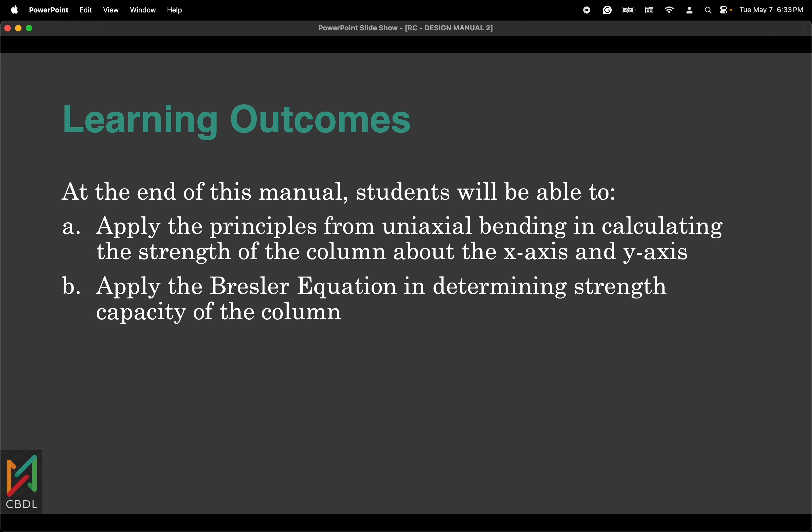For this time, we're going to discuss the analysis of short columns subjected to axial compression and biaxial bending through manual calculation. At the end of this lesson, students will be able to apply the principles from uniaxial bending in calculating the strength of the column about the x-axis and y-axis, and apply the Bresler equation in determining the strength capacity of the column.

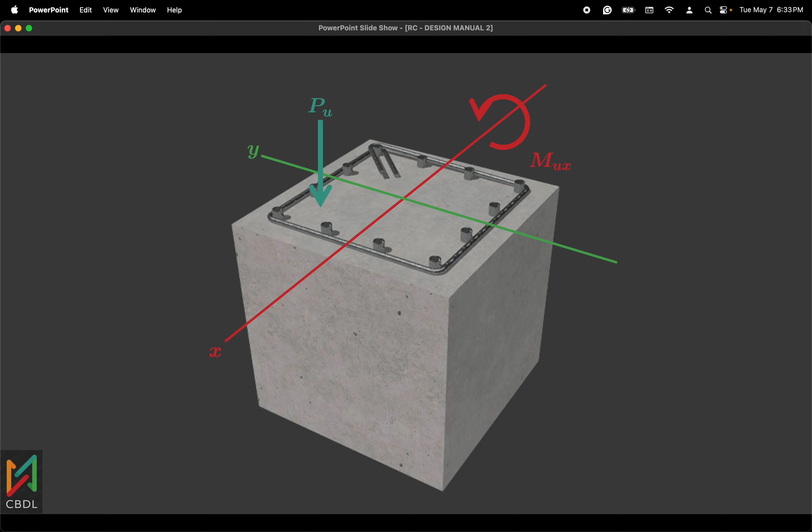Let us say we have here a perspective view of our column, with our x-axis and y-axis, and our PU, which is eccentric along the x-axis and y-axis. Now, talking about biaxial bending, meaning we have moments about the two axes. We have our moment about the x-axis, meaning our PU has an eccentricity along the y-axis, which we call E sub y. Then we also have our moment about the y-axis, meaning it has an eccentricity along the x-axis.

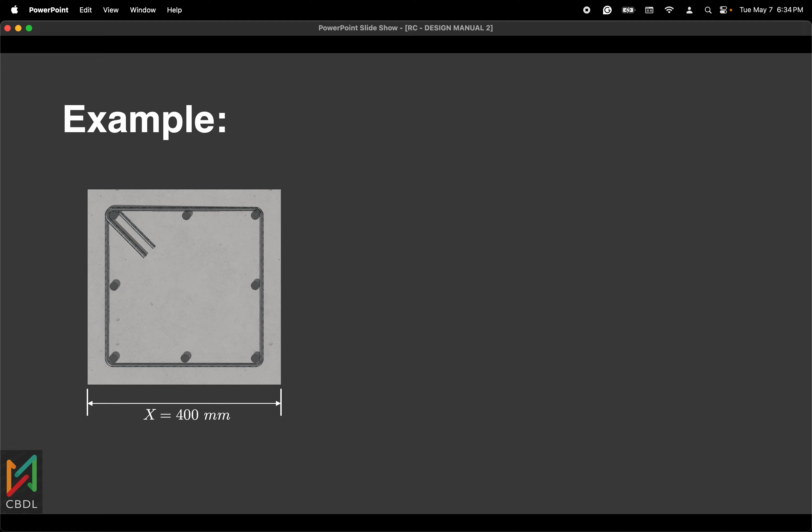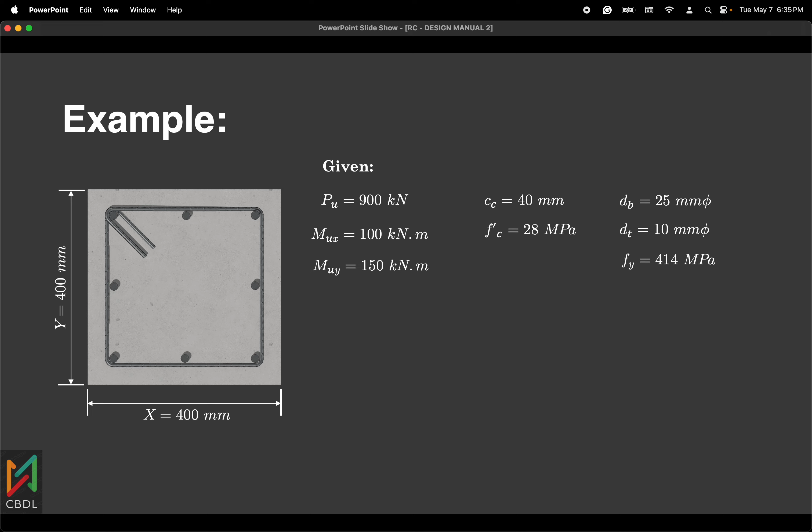For our example, let us say we have a square column with rebars equally distributed along its sides. Let us say our dimension along the x-axis is 400 millimeters and the dimension along the y-axis is 400 millimeters. Given is the axial compressive force, which is 900 kilonewton, the factored moment about the x-axis, the moment about the y-axis, the clear concrete cover of 40 millimeters, our fc' to be 28 megapascal, the diameter of our rebars is 25 millimeters, the diameter of our ties is 10 millimeters, and the yield strength of our steel to be 414 megapascal.

So we're going to find the demand capacity ratio. For our solution, the first thing to do is determine the value for our beta. Since our fc' is equivalent to 28 megapascal, our beta is equivalent to 0.85.

After that, we're going to determine the yield strain, which is just Fy all over Es. By direct substitution, we get the value to be 0.00207.

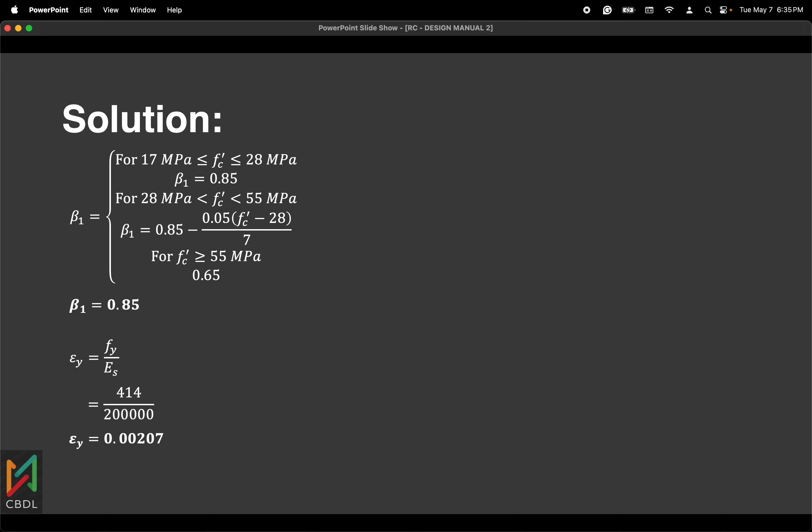Then we're going to consider the bending about the x-axis. If that is the case, our B is equivalent to the dimension along the x-axis, which is 400 millimeters, and our H here is equivalent to the dimension along the y-axis, which is 400 millimeters.

For the layers of our bars, our N bar 1 is 3. So what was done here is that the rebars in the first layer, at the top, there are three. In the second layer, there are two. And at the bottom, which is the third layer, there are three again.

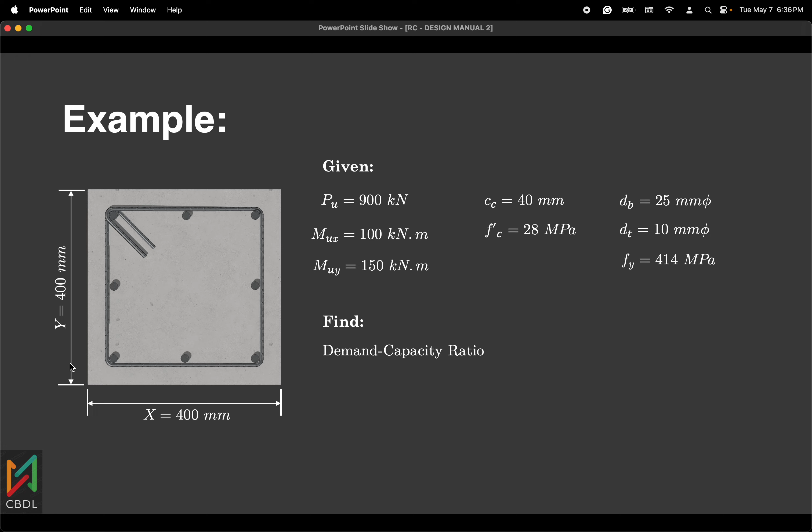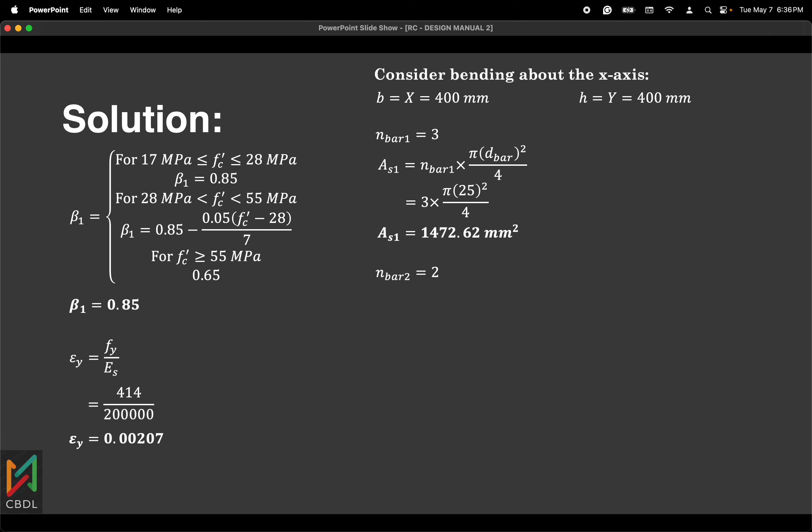So the number of bars in the first layer is 3. Solving the steel area for the first layer, we get 1,472.62. In the second layer, there are only two bars, so the steel area is 981.75. And the number of bars in the third layer is three, same as the first layer, giving 1,472.62.

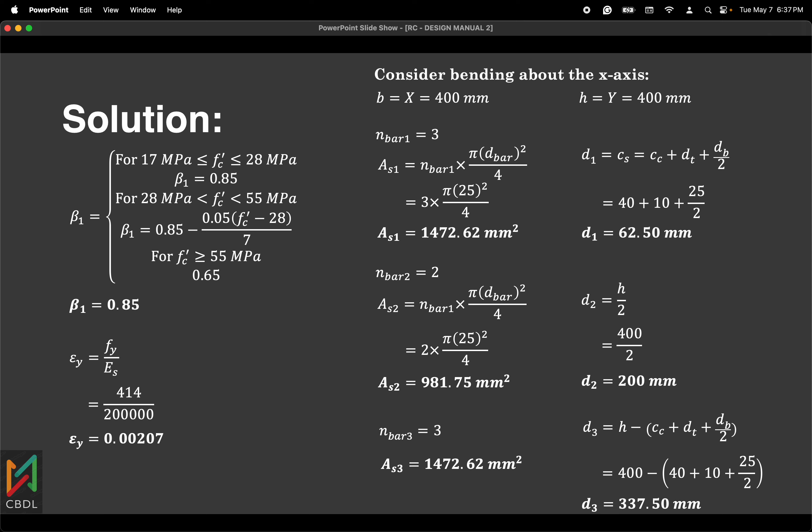Then for the centroidal distances of our bars, our D1 is just equivalent to C sub S, so 62.5. The centroidal distance of the bar in the middle or second layer is just H over 2. Then the depth of our bar in the third layer is 337.5.

Next, we're going to solve for the eccentricity along the y-axis. We just divide the moment about the x-axis by PU. We multiply by 1,000 because the value we solve for is in terms of meters, so we multiply by 1,000 to convert it to millimeters.

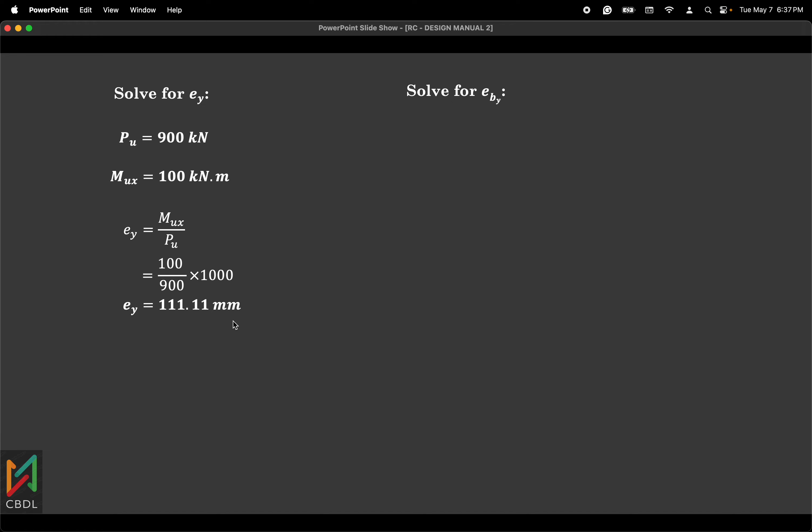After that, we're now going to solve for our balance eccentricity along the y-axis. This is our equation for solving for C at balance condition. By direct substitution, we get 199.7 mm. That means it is below H over 2, our C sub B.

After that, we're going to solve for our A sub B. We just multiply C sub B with beta, and it is now equivalent to 169.75.

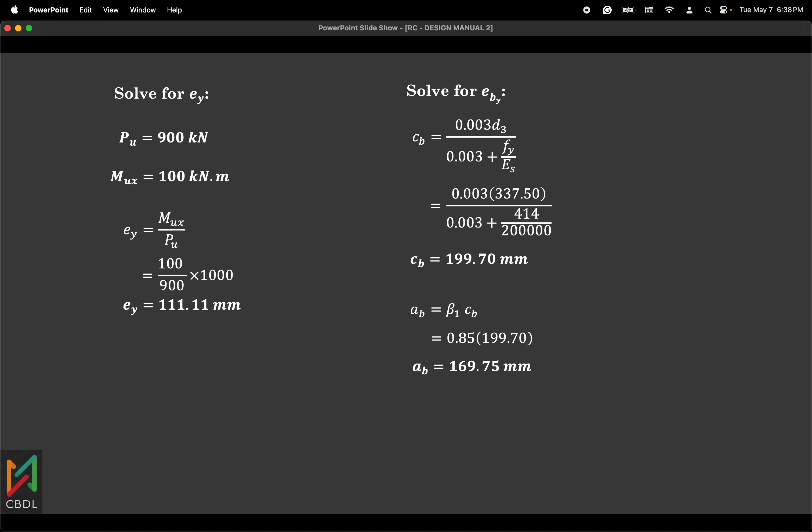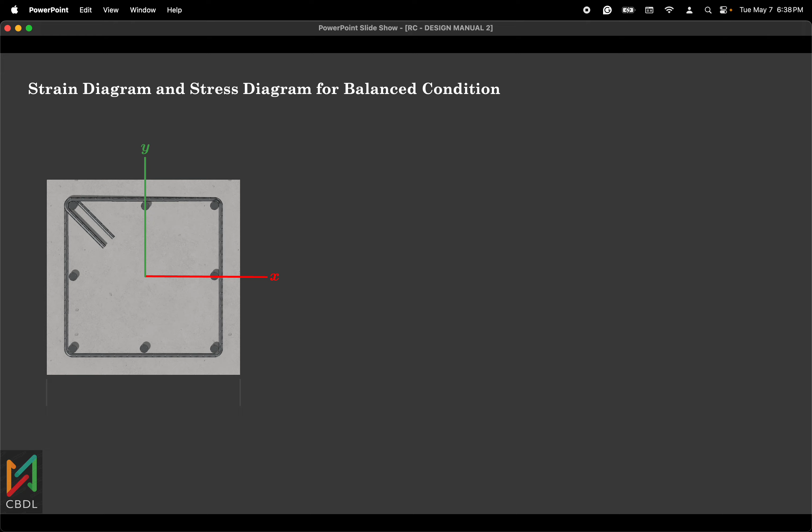After that, we're going to sketch the strain diagram and the stress diagram for the balance condition. Earlier, we solved for D sub 1, D sub 2, and D sub 3, and we also solved for C balance, which is equivalent to 199.7, meaning it's less than H over 2.

So this is now our strain diagram on the compression side, and the strain diagram on the tension side. The strain of the concrete is 0.003. The strain of our reinforcement in the first layer is epsilon S sub 1, and the strain of our reinforcement in the second layer is epsilon S sub 2. And of course, the strain at the extreme tension steel yields. Take note, at balance condition, the concrete and the steel must yield simultaneously.

And also, let's solve the A sub B from earlier. So that's now the depth of the compression block. And the stress is 0.85 Fc prime.

So the compressive force of our compression block will pass through the centroid, which is located at A sub B divided by 2 from the top. Take note, the location of our plastic centroid is H over 2. So again, C sub C will pass through the centroid of our compression block.

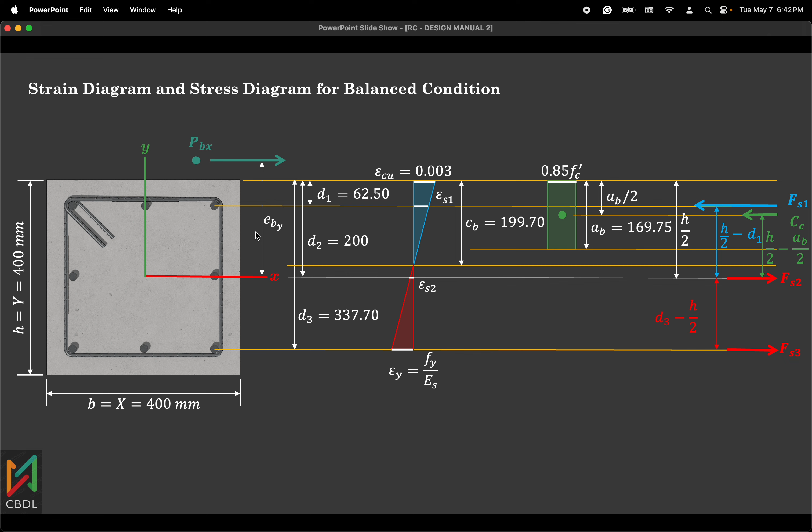Then there's also the balance eccentricity along the y-axis. So to solve for the e-balance, we first need to solve the balance moment, then divide it by the balance load to solve for our e-balance along the y-axis.

So this is now our equation for the strain of our steel in the first layer. Since it's compression, C sub B should come before D sub 1 to avoid negative values. By direct substitution, we get 0.00206.

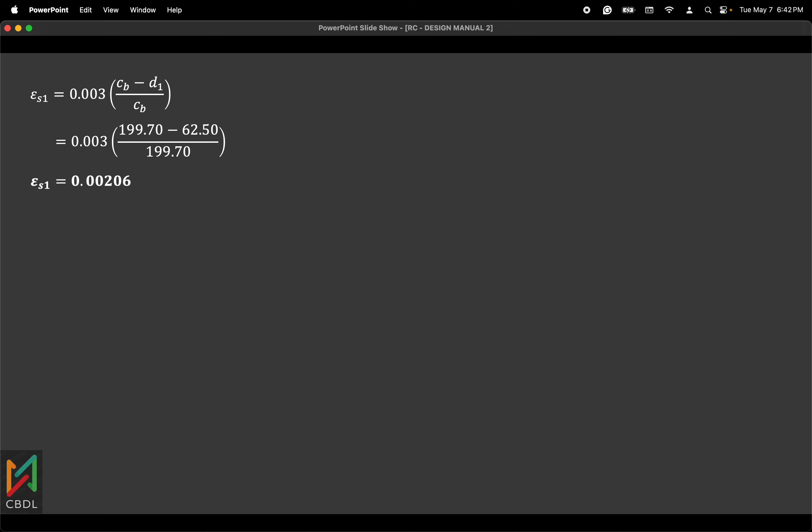As you can see, this is less than the yield strain, meaning our stress will be less than 414 megapascal, our yield stress. So by direct substitution, it's only 412.22.

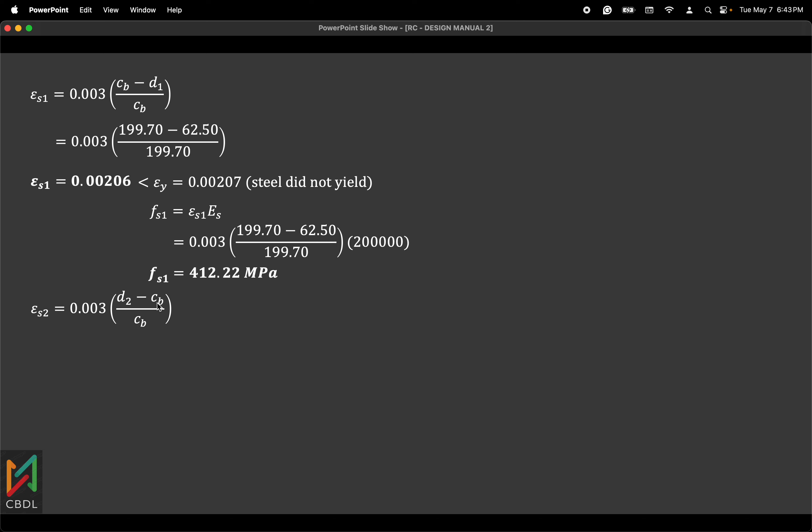Next is our strain in the second layer, since this steel is in tension. So we put D2 before C sub B to avoid a negative value. By direct substitution, this is our strain. Since it's less than the yield strain, the stress of the steel is also less than the yield stress, equivalent to 0.9 megapascal.

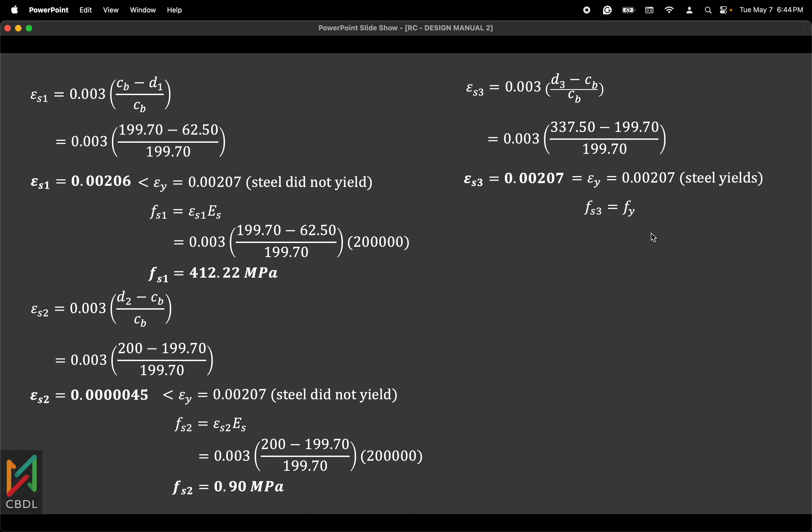Then we also have the strain in our third layer. Since it's in tension, we expect the strain to yield, because this is the balance condition. By direct substitution, we get a value of 0.00207, which is also equal to the yield strain, meaning it still yields. That being the case, our FS3 is now equivalent to our Fy, so FS3 is 414 megapascal.

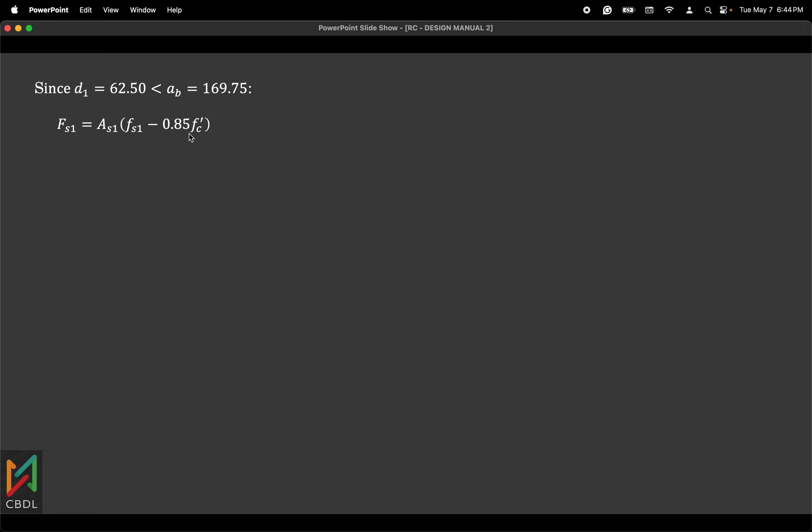After that, since our D1 earlier is less than A balance, meaning our layer of reinforcement is within the compression block, if that's the case, we deduct 0.85 Fc prime from the stress of our steel. So you can see we subtracted 0.85 here in FS1, making our FS1 now equivalent to 574.70 kN.

Also our D sub 2 is 200, but it's greater than A balance, meaning our layer of reinforcement is now outside the compression block. So we don't need to deduct 0.85 Fc prime. By substituting the values, we get our FS2 to be 0.88 kN.

Then lastly, D sub 3 is equivalent to 337.5, which is greater than A balance, so again no need to deduct 0.85 Fc prime, since this is obviously tension steel. So our FS3 is 609.66 kN.

So our C sub C, the equation is 0.85 Fc prime, the stress, times the area of the compression block at balance condition. By direct substitution, we get a value for our CC.

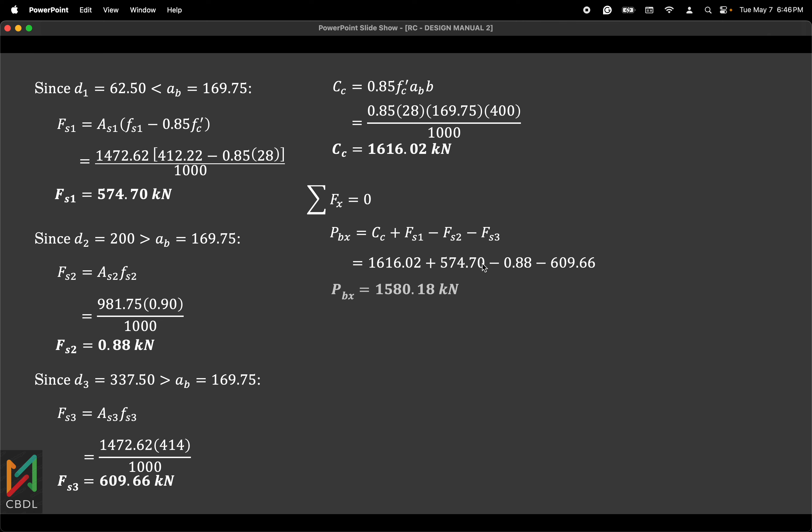Then we sum up forces along the x-axis. So our PBX is just equivalent to CC plus FS1 for compression, minus FS2 minus FS3. Direct substituting the values, our PBX is this value.

And then we also take moment about the centroid. So this is now our equation. By direct substitution, we get a value for our balanced moment to be this value.

Since we now have the moment, the balance moment, and the balance load, we can solve the eccentricity, the balance eccentricity along the y-axis. So we get the value here to be 220.79 millimeters.

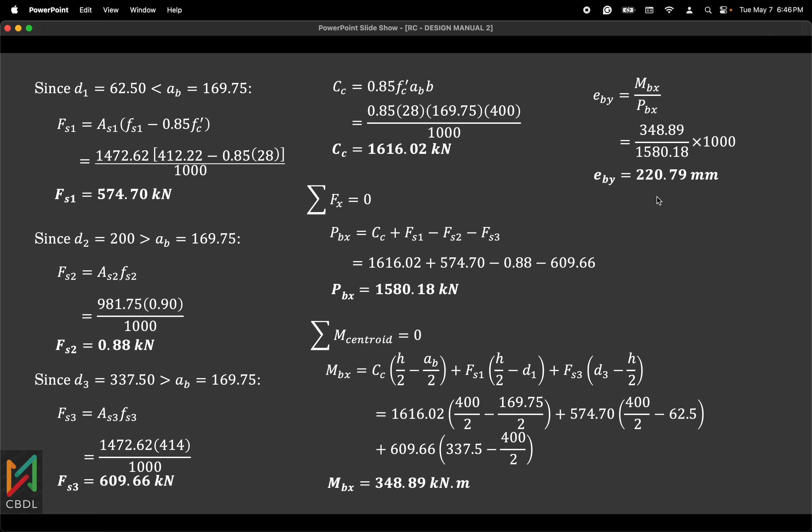After that, we're going to evaluate if it's tension controlled or compression controlled. So our E sub y is 111.11 millimeters, which is less than the balanced eccentricity of 220.79. So that means it's compression controlled.

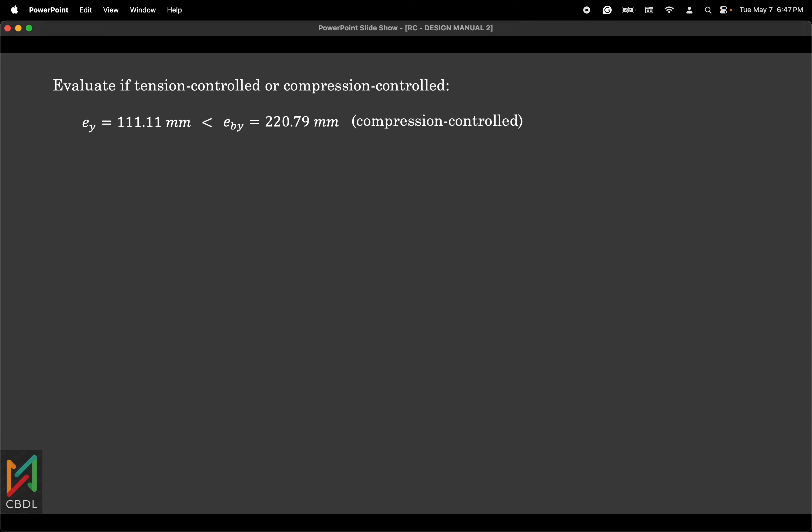So if it's compression controlled, meaning a large portion of our cross-section of the column will be subjected to compression. If that is the case, the steel at the third layer will not yield.

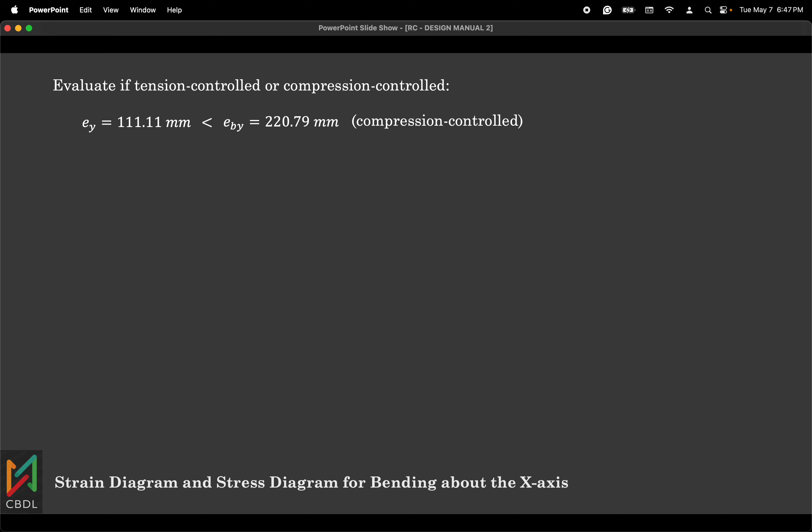So this is the strain diagram and stress diagram for bending about the x-axis. We have our x, y dimensions. Let's recall the location of D sub 1, D sub 2, and D sub 3. Since compression controlled, as I said earlier, a large portion of the cross-section of the column will be subjected to compression. If that is the case, our C should be greater than H over 2.

So this is the approximate location of C, which we need to find. So that is now our strain diagram for the compression part. And this is the strain on the tension side. As you can see here, since the strain diagram on the tension side becomes smaller, we have an expectation that our steel at the third layer will not yield.

So this is the strain of the concrete. This is our strain at the first layer. So we have an expectation here that it will equal or exceed the yield strain. And as you can see here, the strain at the second layer of reinforcement is small, so it is less than the yield strain. Also, the strain at the third layer, we have an expectation that it is less than the yield strain.

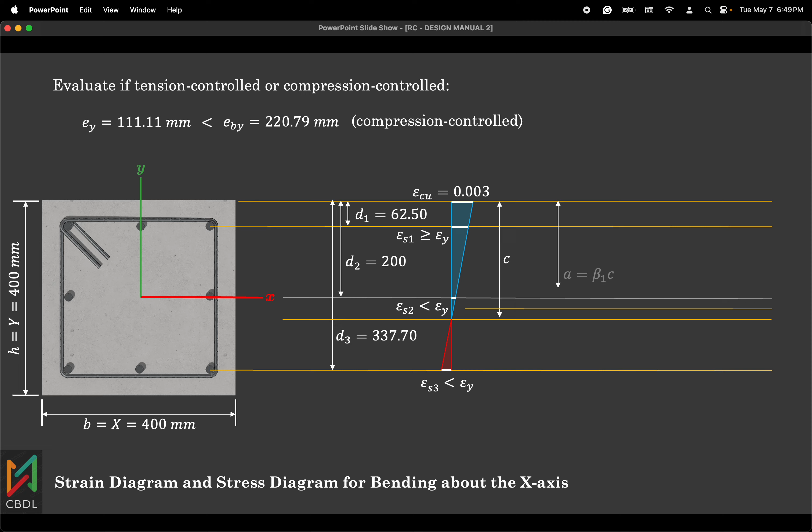So after that, I also approximated here the location of our A-balanced. Sorry, it's not A-balanced anymore. This is now A, that is the depth of our compression block. So that's it, this is now our A. Beta 1 times C. This is just my assumption that it will exceed H over 2.

But you could also assume that it is less than H over 2 on this side.

Okay, so we have our stress here for the compression block to be 0.85 FC prime. This is the centroid of our compression block, where our C sub C will pass through. So the location of our centroid of the compression block is still A over 2, and this is H over 2. So our C sub C is right here.

So it passes through the centroid of the compression block. Also, if we take moments at the third layer, we will have a moment arm of D3 minus A over 2.

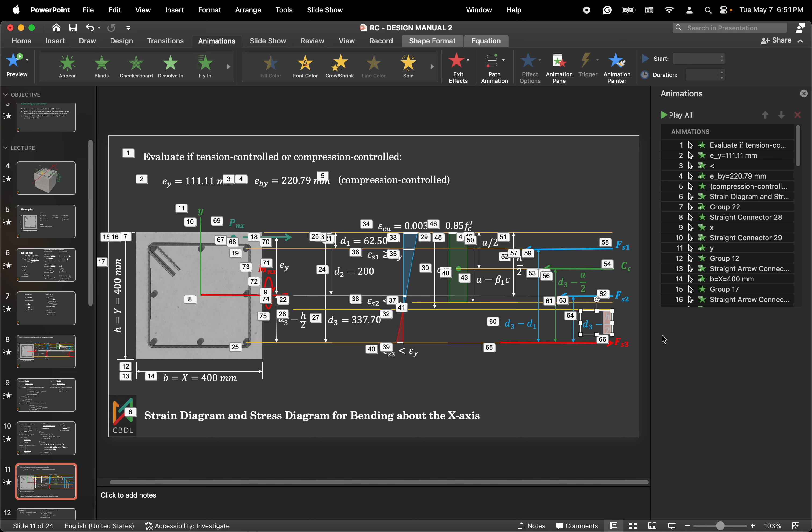Let me just replace this with D, D sub, I'll keep it as is. Anyway, they're equal. Okay, so D3 minus D2, or D3 minus H over 2, since the value of D sub 2 is the same as H over 2.

Then we have our FS3, this is the force of our tension steel at the third layer. So we have no moment arm because we will take moments here. So also, this is the approximate location of PN sub X.

And of course, this has an eccentricity along the y-axis which we solved earlier. And it has, since you have a load, then there's an eccentricity meaning you have a moment about the x-axis. So these are my assumptions in order to solve for C.

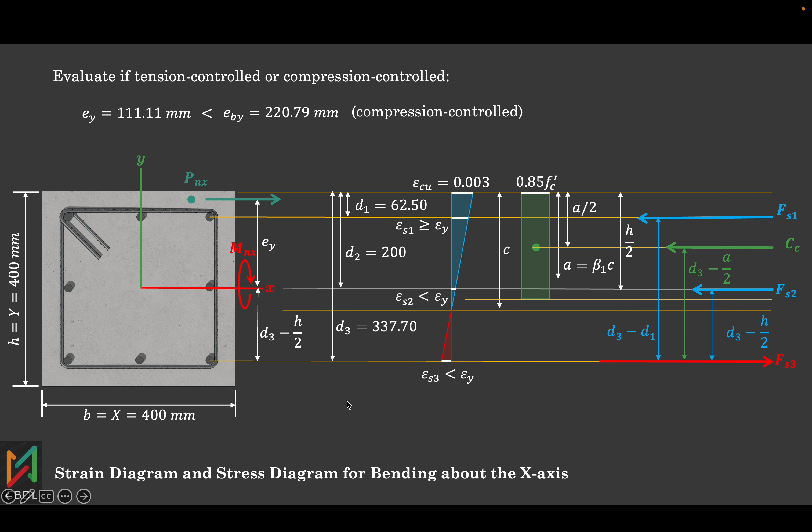Also, since we're taking moments at the third layer, meaning the moment arm of Pnx going to the third layer is E sub Y plus D3 minus H over 2. So solving for C, this is our assumption for the first one.

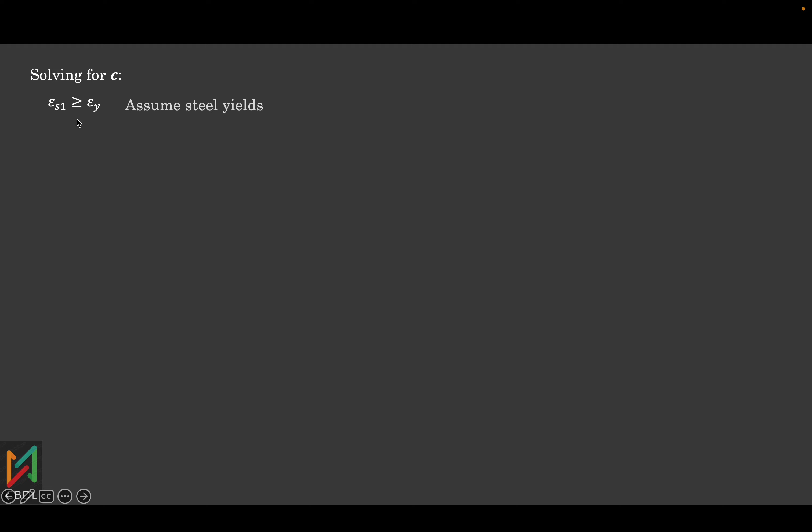The strain in our first layer yields. So we assume its steel yields, therefore our Fs1 will be equivalent to Fy.

Our steel here is inside the compression block, so we need to deduct 0.85 Fc prime from the stress of our steel. So Fs1 is equivalent to this. By direct substitution, we'll get the value of our Fs1 in terms of Newton.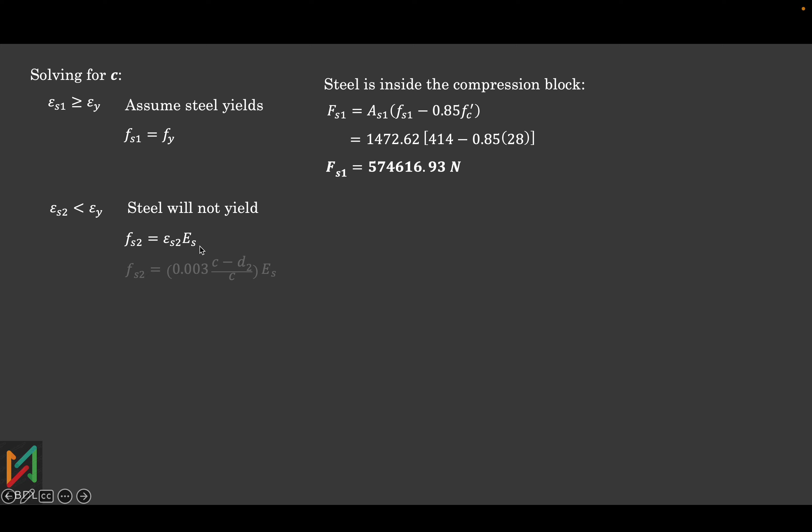Then the strain of our steel in the second layer, we expect it to be less than the yield strain, so steel will not yield. Meaning our Fs2 is equivalent to epsilon S2 times ES. So by directly substituting the equation for our strain in the second layer, with C as unknown.

This now becomes the equation of Fs2, as you can see we deducted 0.85 Fc prime because we expected or assumed that the second layer is within the compression block. Anyway, later we'll check if our assumption is correct or not.

Then the strain of our steel in the third layer is less than the yield strain, so steel will not yield. Therefore our Fs3 is equivalent to this equation, in terms of C. By direct substitution into our equation, we'll get this equation in terms of C.

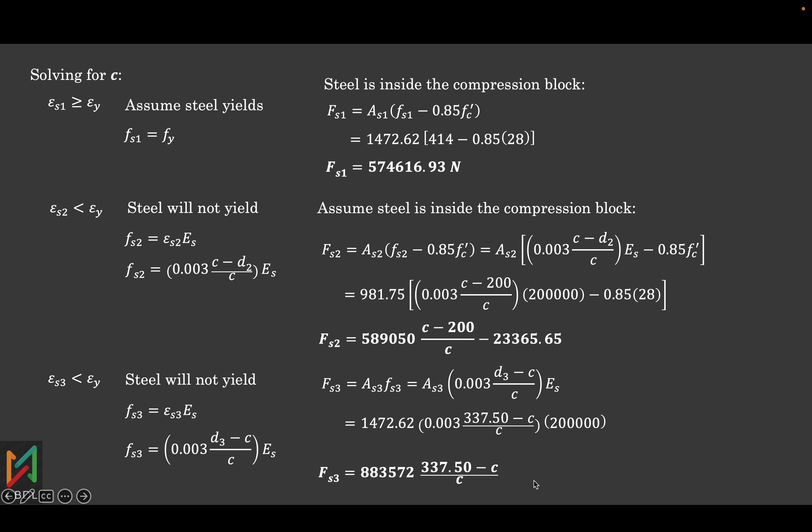After that, we also solve the equation of our CC in terms of C. Take note, our A is equal to beta times C. So by direct substitution, we now have our CC in terms of C.

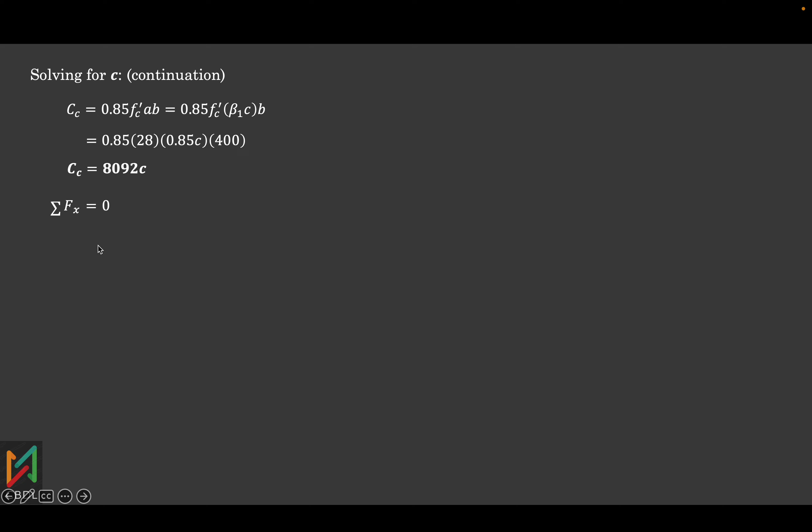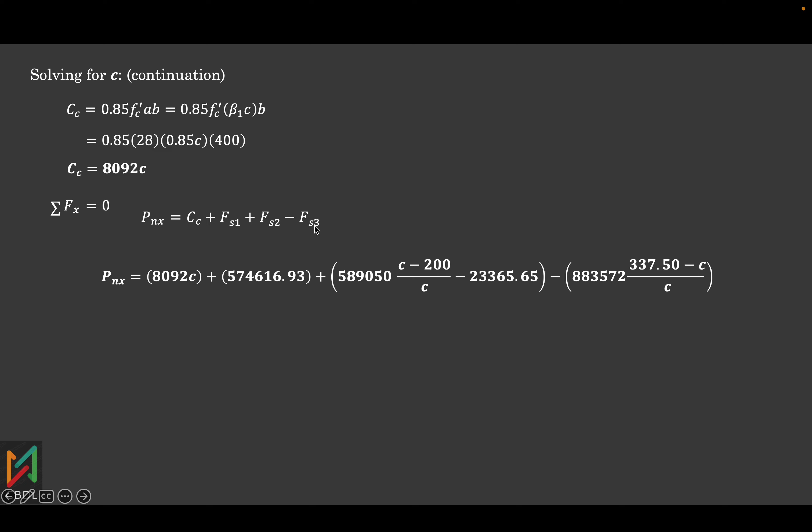After that, we sum up forces along the x-axis to be equivalent to zero. So our PnX will now be equal to CC plus Fs1 plus Fs2 minus Fs3. Substituting the equations of CC, Fs1, Fs2, Fs3, we'll get the equation for our PnX.

After that, we solve the moment arms of our forces relative to Fs3. This is the moment arm of our CC: D3 minus A, all over 2. Our A is equivalent to beta 1 times C. Substituting our D3 and beta 1, we'll get this equation for our moment arm.

Next is the moment arm of Fs1 to Fs3, which is just D3 minus D1. Substituting the values, we'll get the value for our moment arm.

After that is the moment arm of Fs2 to Fs3, directly substituting D3 and D2 values. This is the value. Then the moment arm of our PnX to Fs3.

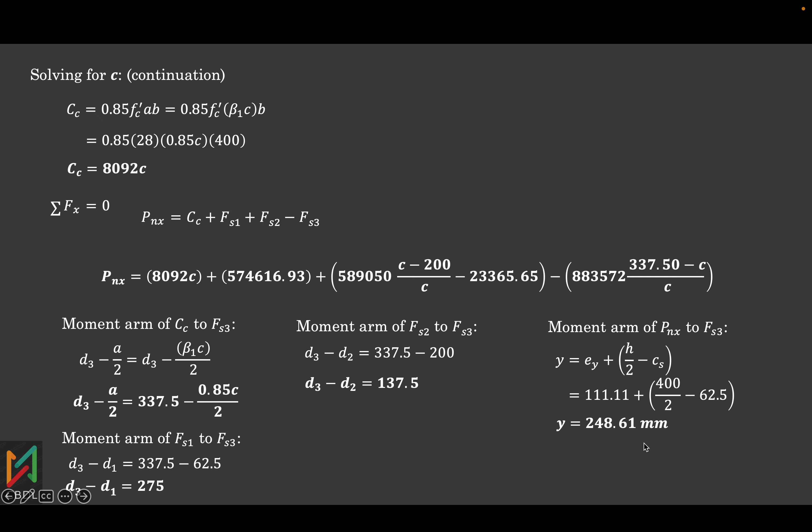So it's EY plus H all over 2 minus CS. Substituting the values, we'll get the value for our moment arm. After that, we sum up the moments about the third layer, Fs3, and this now becomes our equation.

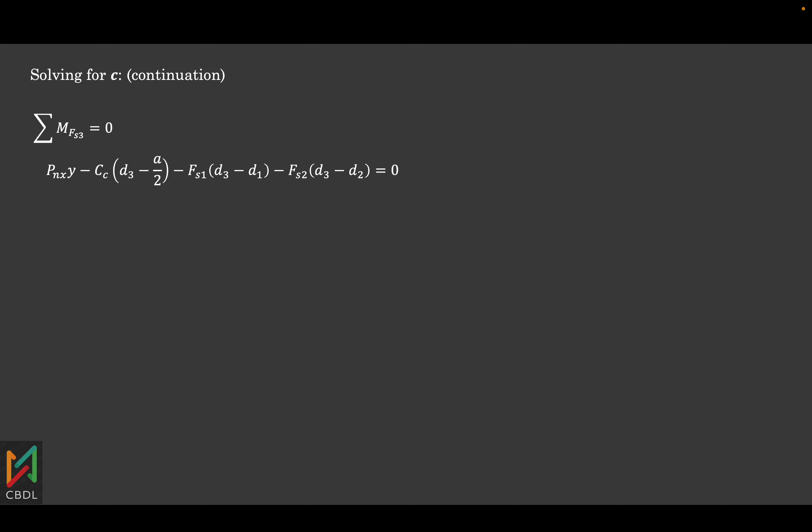Again, when it comes to directions, just refer to our diagram, the stress-strain diagram, for the rotations, whether positive or negative. So substituting the equations, then using the shift-solve function of our calculators, we'll get the value for our C to be equivalent to 269.66 millimeters.

After that, we check if the calculated C is correct by verifying the assumptions. We directly substitute C into the equation of our strain in the first layer of reinforcement, and we'll get a value of 0.0023, which is greater than the yield strain, meaning our assumption is correct.

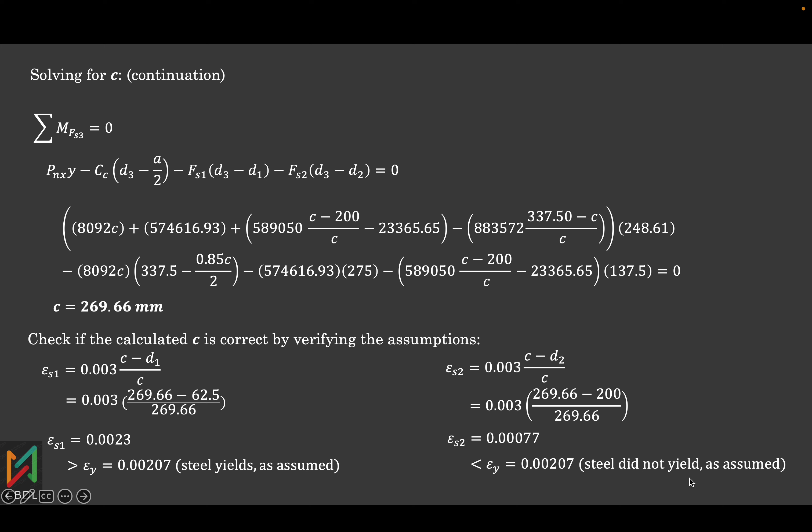After that, we substitute into the equation of our strain in the second layer, getting 0.00077, which is less than the yield strain, so it still did not yield as assumed, so the assumption is correct. For the third layer, we substitute, but there was an error in our strain equation here. Let me correct it.

So, substituting the values, we'll get 0.00075, which again is less than the yield strain. Therefore our steel did not yield, as assumed, so the assumption is correct.

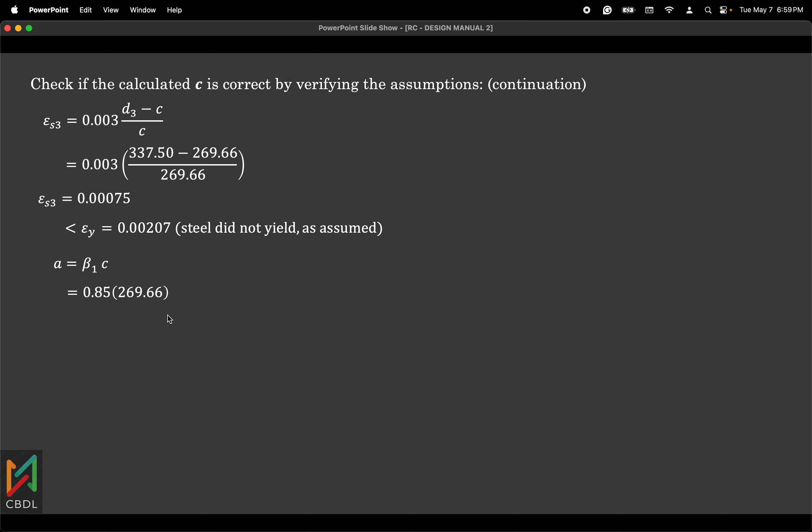After that, we solve for our A, which is just equivalent to beta 1 times C, so 0.85 times the solved C, and we get this value. Since our D1 is 62.5, which is less than A, the steel is within the compression block, meaning our assumption is correct.

Next, our D2 is equivalent to 200, less than our A, meaning it's still within the compression block, as assumed, so the assumption is correct, and that's why we deducted 0.85 Fc prime from the stress of our steel. Next, since D3 is 337.5, greater than A, the steel is outside the compression block, so the assumption is correct as assumed. Now, since all assumptions were verified, the calculated value of C is correct.

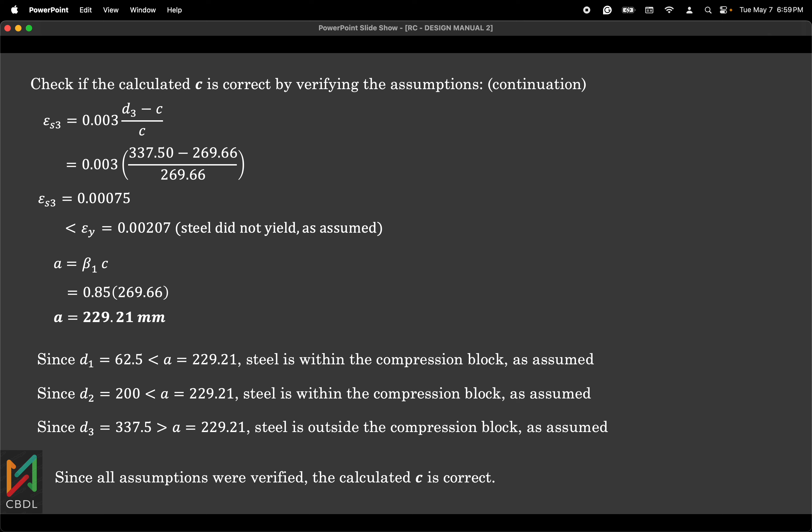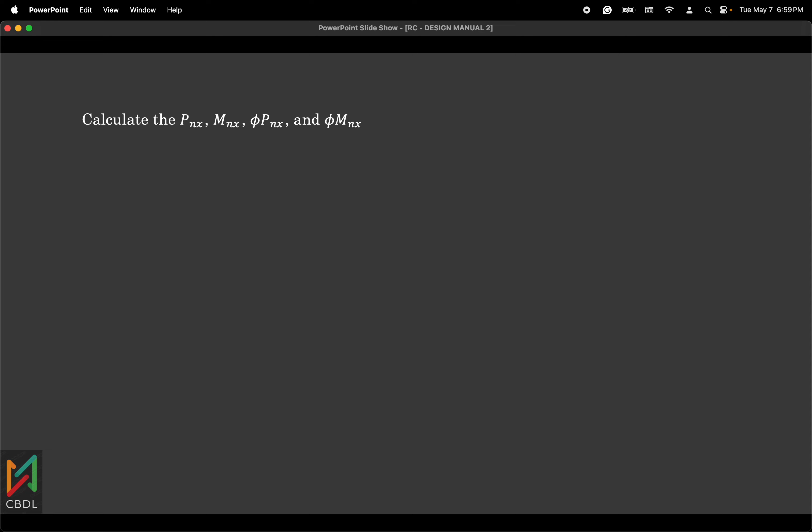After that, we can substitute this into our equations to solve our strength capacities: calculate PnX, MnX, phi PnX, and phi MnX. This is the equation of our nominal axial force along the x-axis. By direct substitution of the value of C into the equation, we'll get our PnX to be this value. After that, we can solve for the moment, the nominal moment about the x-axis.

Actually, you can take moments about the centroid to get MnX, but the calculation becomes long. So what we'll do instead is a shortcut: take the solved PnX and multiply it by the eccentricity, and you'll get the same answer.

You'll get a value of 295.91.

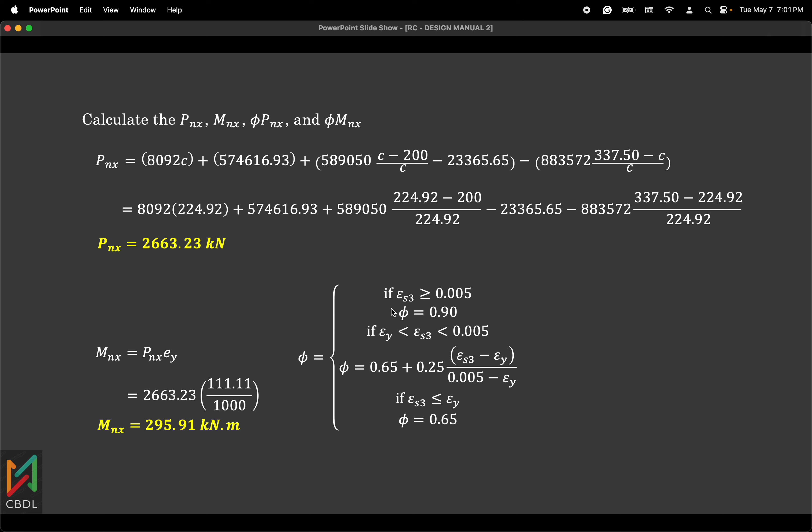After that, we're going to solve for our phi. To solve for phi, we refer to the strain of our reinforcement at the tension side, at the third layer. The value we solved earlier is 0.00075, which is less than the yield strain. So our phi is equivalent to 0.65, confirming that our evaluation of compression controlled is correct.

So this is now the calculation to solve for the design strength capacity. 0.65 times 2,663.23 gives you 1,731 to be your phi PNX. Our phi MNX is 295, multiplied by 0.65, you'll get your phi MNX.

Take note, this is still just bending about the x-axis. We still have remaining strength capacities to solve for the bending about the y-axis.

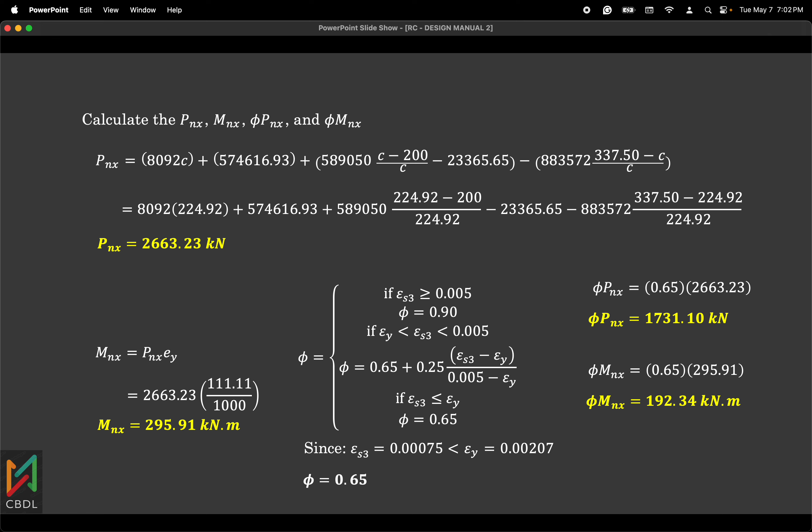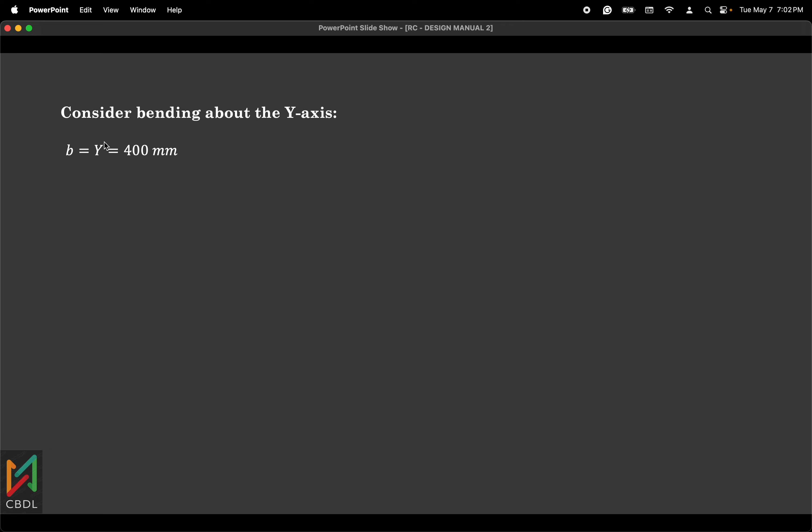Considering the bending about the y-axis, our b will now be equal to the y, and our h will be equivalent to the x. The area of our steels, since they are symmetrical, remains the same. Also D1, D2, and D3 remain the same since the dimensions are all 400 mm.

Since the dimensions are the same, the balance eccentricity we solved earlier is still the one we'll use, because the value is the same. However, if the dimension were different, let's say 400 by 500 mm for the column, you would have to resolve again for the balance eccentricity along the x-axis because the value would be different. It just happens that the balance eccentricity is the same value because our column is square.

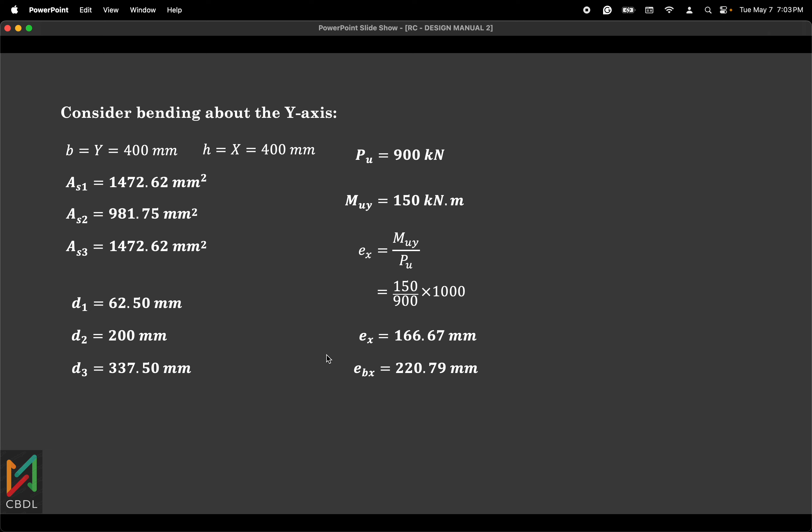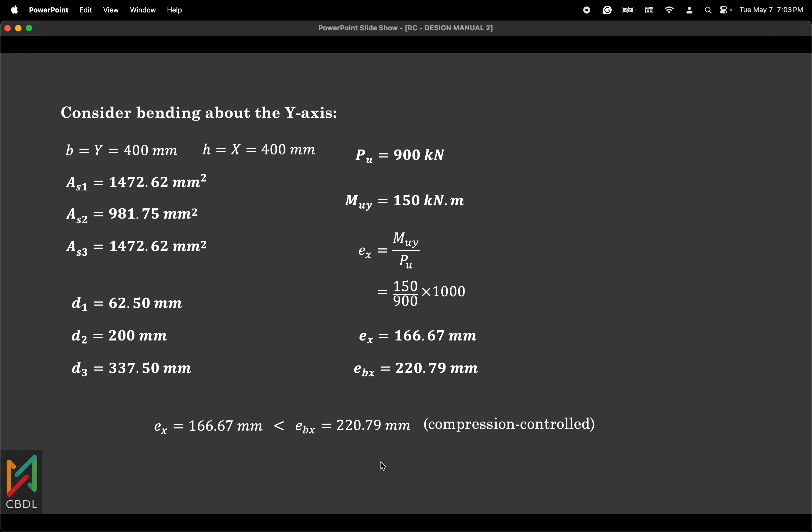Since our eccentricity along the x-axis is less than our balance eccentricity along the x-axis, it is still compression controlled. Again, for this I did not make a stress strain diagram, but in your calculations you should still sketch the stress strain diagram.

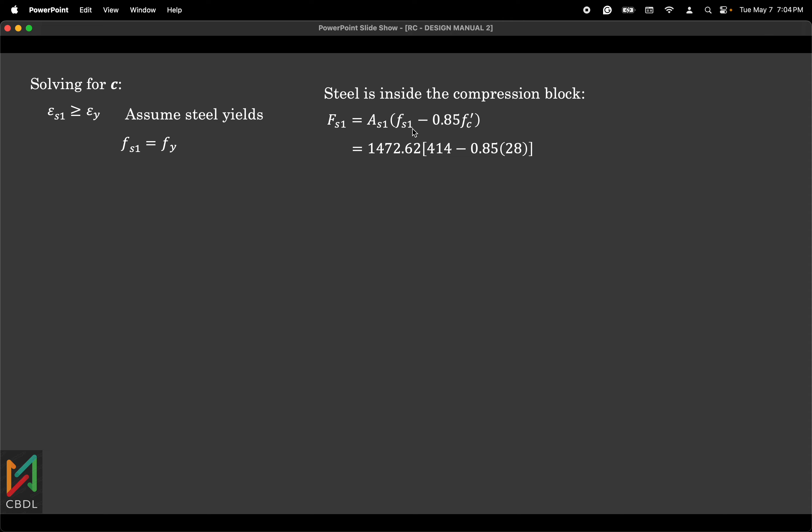So again, we're going to solve for our C for the bending about the y-axis. These are my assumptions: assume steel yields, so Fs1 is just equal to Fy. The steel is inside the compression block, so we subtract 0.85 Fc prime from the stress of our steel, and we'll get this value.

Also, the strain at the second layer, again steel will not yield, so this is the equation for Fs2. After that, I assumed that the steel is outside the compression block. Since it's outside the compression block, we don't deduct 0.85 Fc prime from the stress of the steel. Again, this is just an assumption, you still have to counter-check it later if you get a solved value of C. Substituting the equations and values, you'll get the equation for Fs2 in terms of C.

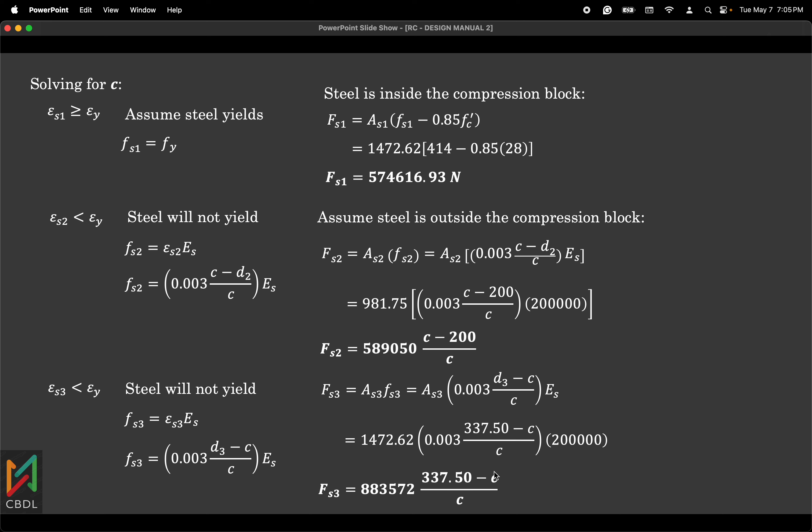Then the strain at the third layer, steel will not yield, so this is the equation for the stress. You substitute it into the equation for Fs3. Substituting the values, we'll now have the equation for our Fs3 in terms of C. For our Cc, this is the equation.

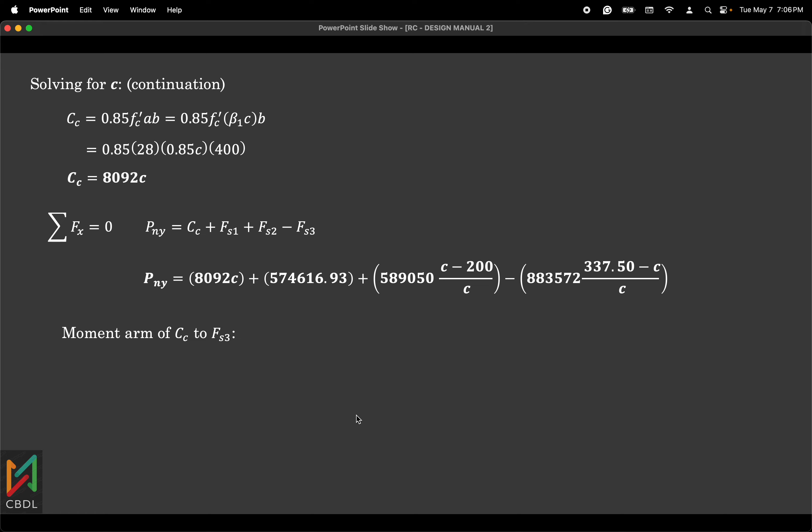Then sum up the forces along the x-axis. Again, it is necessary that you have a stress strain diagram. This is my equation. Direct substituting the equations for your forces in terms of C, you'll have the equation for Pny. After that, solve again for the moment arms of Cc going to Fs3.

Ito yung mga moment arms, yung mga values. Yung moment arm ng Pny natin to Fs3, so X na siya. This is now equivalent to ex plus h over 2 minus cs. So substituting the value, you'll get the value for the moment arm ng inyong Pny.

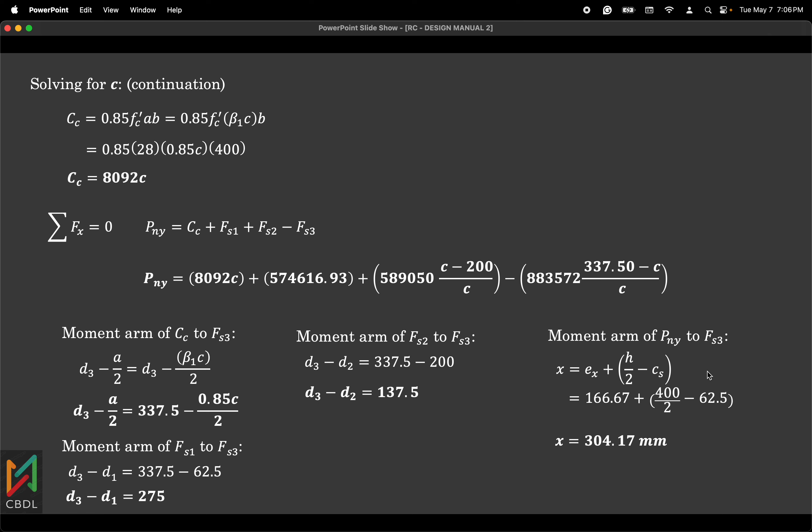Kung mag-moment tayo doon sa third layer, solving for C, continuation. So, mag-sum up tayo ng moment again sa ika-third na layer. So, ito na yung magiging equation natin. Using the shift solve na function ng inyong calculator, you'll get this value.

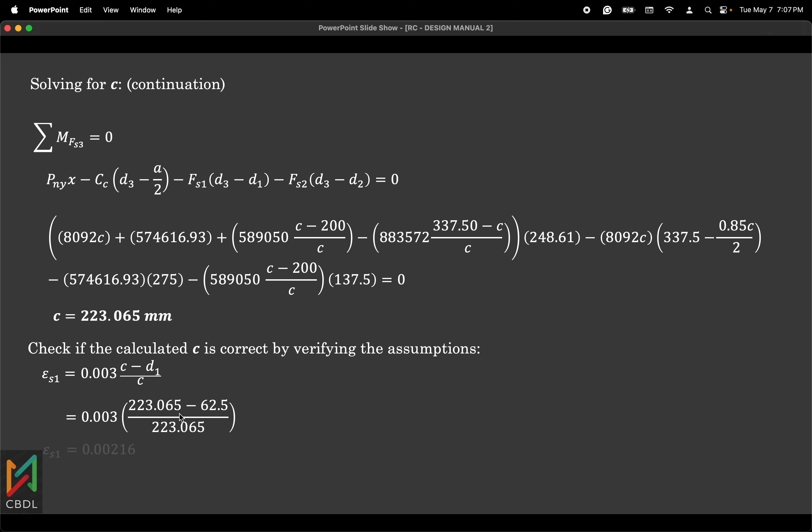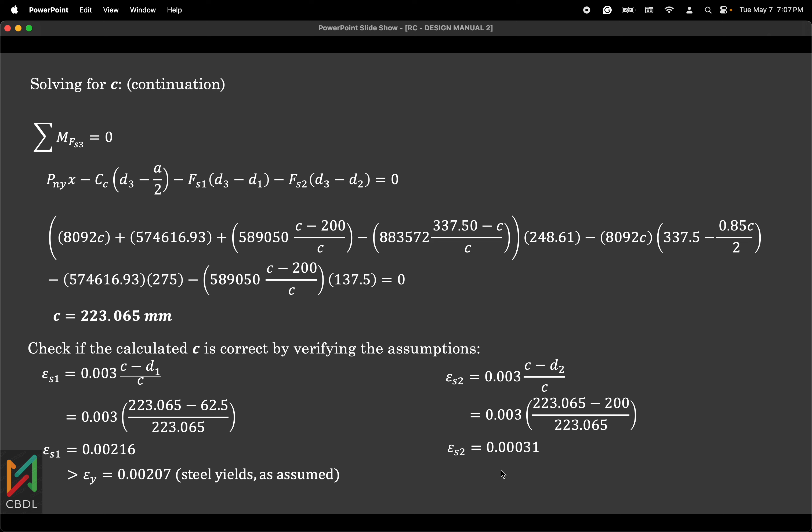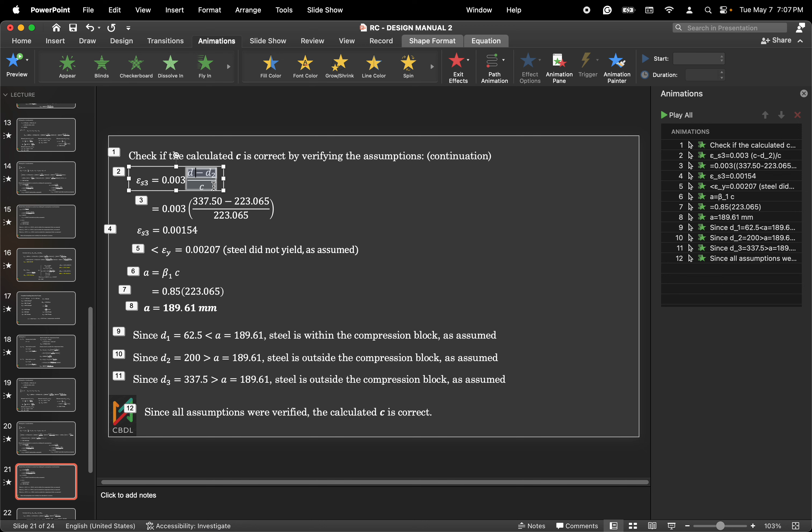After that is to check if the calculated C is correct by verifying the assumptions. So, again, you direct substitute the value of your C sa equation ng mga strains ninyo. Ito na yung value. So, since greater siya sa yield strain, so steel yields as assumed. Tama yung assumption. Sa second layer, hindi siya nag-yield, less than siya sa yield strain. So, as assumed, tama. After that, sa third layer, let me correct this - this should be D3 minus C.

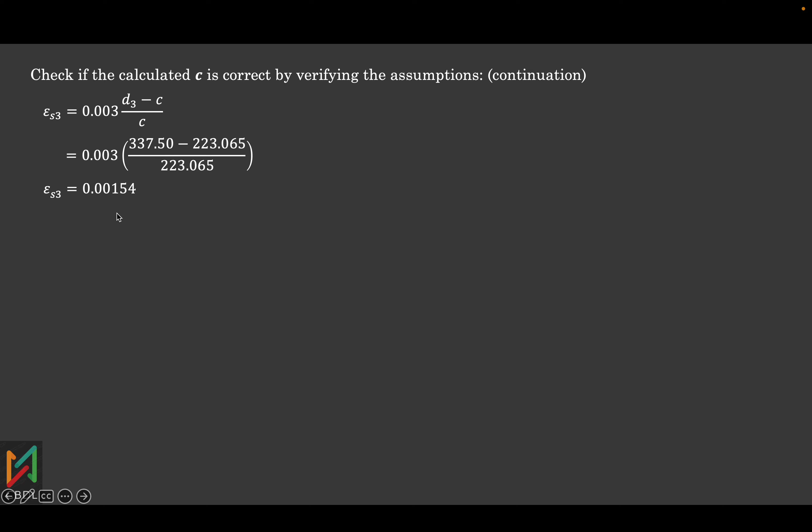Okay, so yung value is 0.00154. So, less than siya sa yield strain. So, still did not yield. So, as assumed, tama. For that, you solve again for your A.

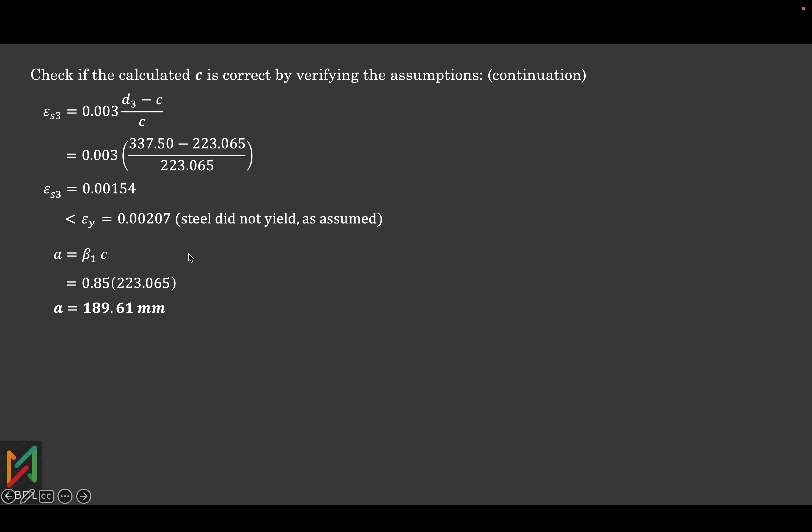I-counter check ninyo if tama yung assumption ninyo na yung steel ba ninyo is within or outside pa sa compression block. So, since yung D1 is 62.5, less than siya sa A, so within the compression block, as assumed, tama. And then kanina, yung nag-assume tayo na sa second layer na yung steel natin is outside the compression block. Tama kasi yung D dito natin is 200 pero yung A is only ano siya 189, so outside the compression block yung second layer. Sa third layer, yung D3 is 337.5 greater than A, so still is outside the compression block, so as assumed so tama siya.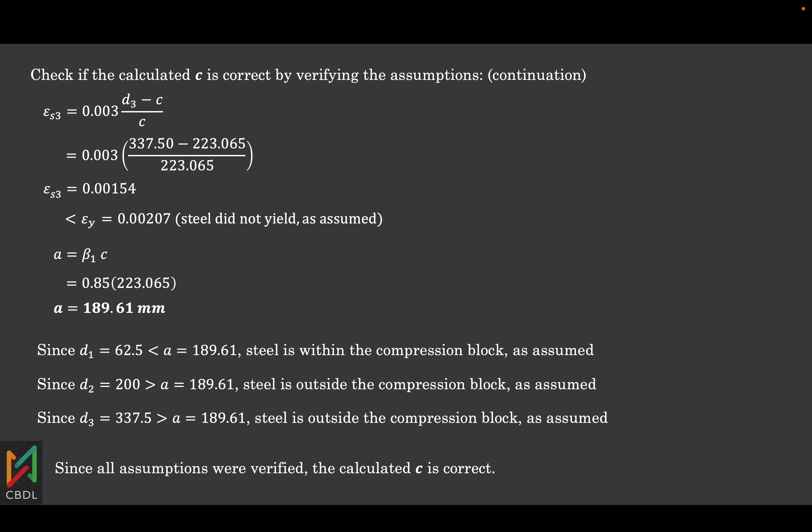So, since all assumptions were verified to be correct, so the calculated value of C is correct. So, that is the case, pwede nating ma-solve yung mga strength capacities, nominal tsaka yung design. So, substituting the value ng inyong C doon sa equation ng inyong PNY, so you'll get this value.

After that, to solve na for your moment, ano lang, multiplyan nyo lang to ng eccentricity along the x-axis. So, 331.22 kilonewton meter.

So, after that, solve nyo naman yung phi. So, yung strain natin sa ika-third na layer is 0.00154, so less than siya sa yield strain. Meaning, 0.65 yung magiging value ng ating phi. Tama kasi based on our evaluation kanina, compression controlled siya.

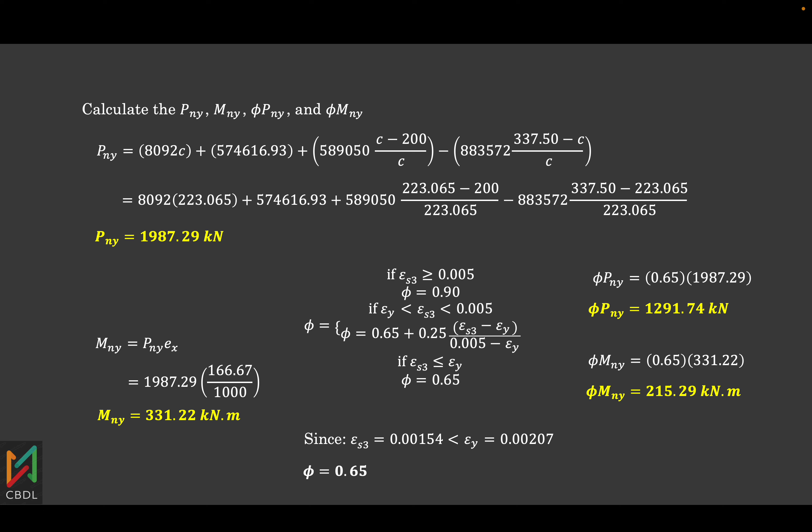So, PNY is just equivalent to 1987. You just multiply it by phi, you'll get this value. Phi MNY, itong 331, you just multiply it by 0.65, you'll get this value naman. So, after getting the values, mga strength capacities about the x-axis, tsaka sa y-axis, pwede nyo nang masolve naman yung P sub O tsaka yung phi PO. So these are necessary kasi gagamitan natin to ng Bresler equation.

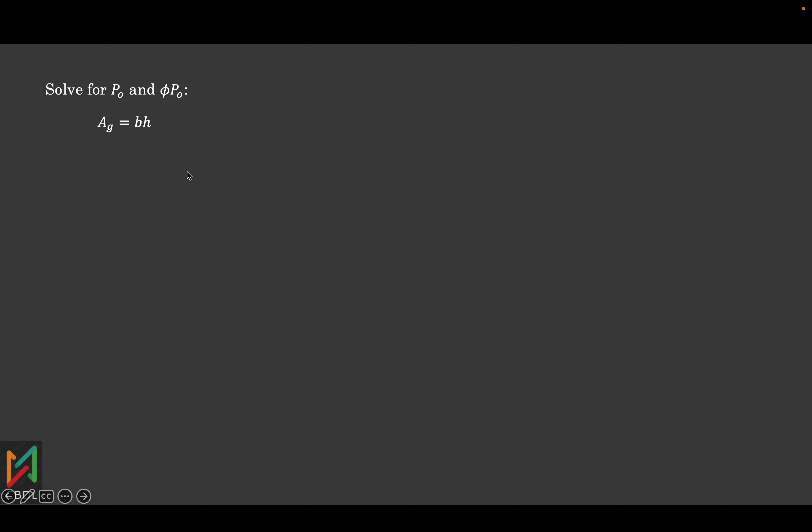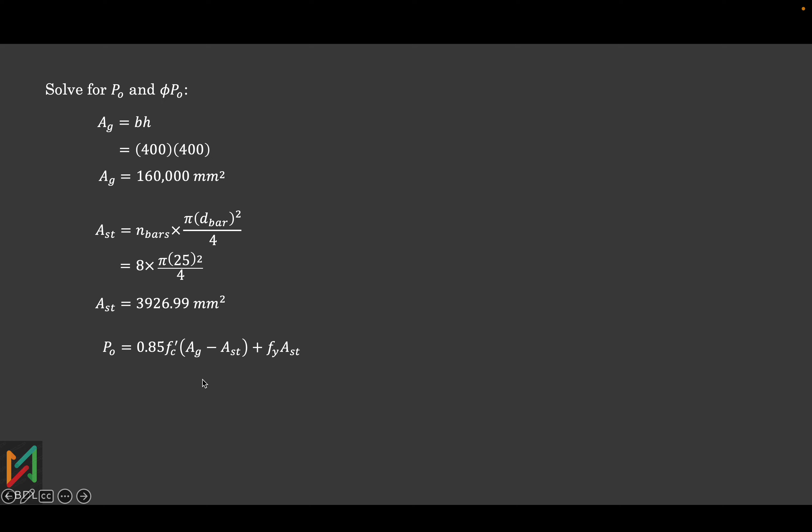So to solve for your P sub O, ito yung pure compression, solve nyo muna yung gross na area, so lang B times H, 400 times 400, you'll get this value. After that, you solve for the total steel area kasi 8 yung bars natin, you just multiply it by the pi 25 squared all over 4, you'll get this value naman. After that, you substitute it sa equation ng pure compression na equation, so by direct substitution, you'll get this value.

So, phi P sub O naman, kasi pure compression siya, so compression controlled, so yung phi mo is 0.65. So, you'll get this value.

After that, you solve for the phi Pmax. So, ang Pmax natin is lang siya, 0.8 times yung P sub O, according to sa code. So, you multiply 0.8 dito sa value ng P sub O, you'll get this value naman. Then, yung phi Pmax naman is, since compression controlled, so 0.65 lang times 4,272.25.

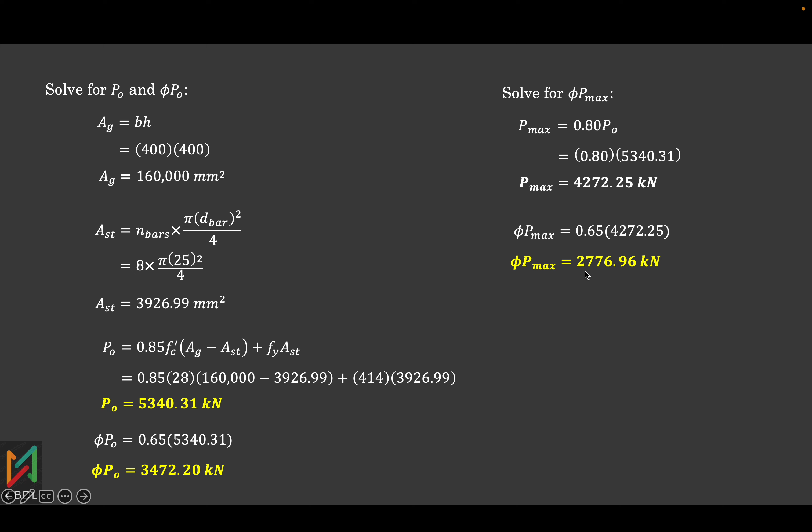Kasi ito siya, mga pure compression, so 0.65 yung phi natin. So, this is now equivalent to 2,776 yung phi Pmax.

So, after that, isosolve na natin yung strength capacity talaga, phi Pn. So, using the Bresler equation or reciprocal formula, ito yung equation. Substitute ninyo yung mga values ng phi Pnx, phi Pny, tsaka yung phi Po. Dapat less than siya or equal sa phi Pmax. Kung whichever is the minimum value dito sa dalawa, yun yung mag-govern na phi Pn natin. Okay? So, by direct substitution, ito na ngayon yung value, 940.

Tsaka yung phi Pmax natin is 2,776.96 kilonewton siya. So, since less than, yung na-calculate natin na 940 sa phi Pmax, meaning yan yung mag-govern.

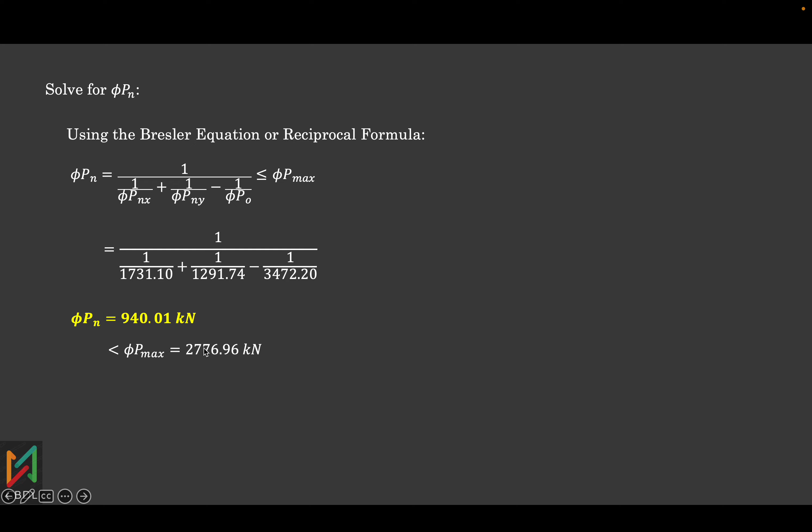Okay, so after that, we will now be able to solve for the demand capacity ratio. So yung demand, meaning yan yung ano natin, yung factored na load. Yung capacity, yun yung phi PN, nakasolve lang natin. So 900 divided by 940.01, so you'll get a value of 0.96. Since this is less than 1.00, so meaning safe.

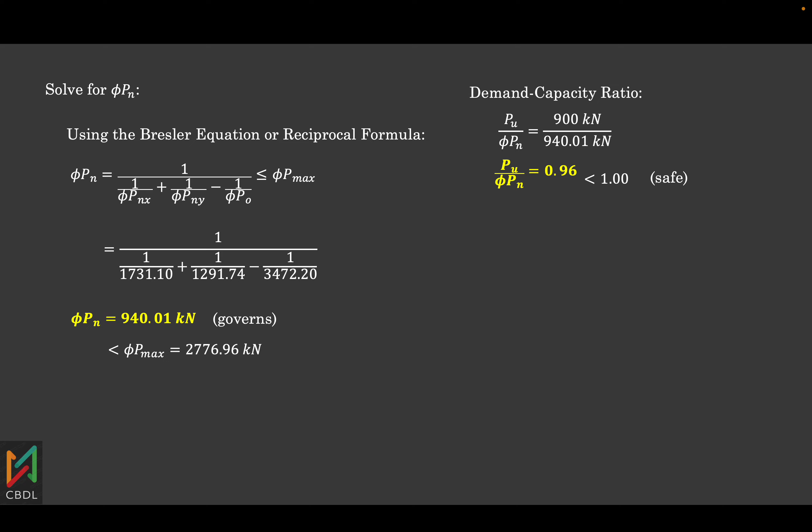So that ends our lecture for short column subjected to axial compression and biaxial bending.